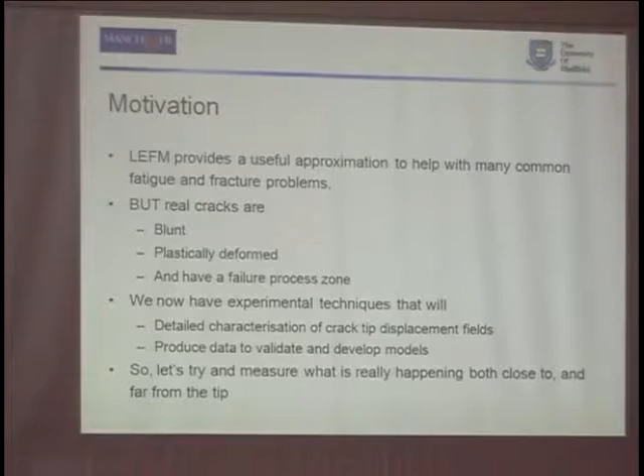The motivation behind this work is that we all agree linear elastic fracture mechanics gives us a useful approximation to help with many fatigue and fracture problems. However, real cracks are blunt, they're plastically deformed, and depending on the loading and material properties, have different failure process zones. But we now have many good techniques for detailed characterization of this crack tip field, and we believe this can help us generate a lot of data to validate as well as develop new analytical models to help us deal with fatigue and fracture.

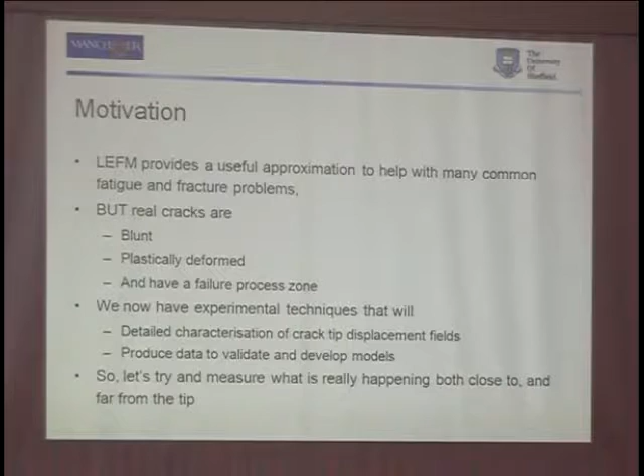So we decided to try and measure what's really happening both close to the crack tip and far away. Now I'll go on to the experimental work that we did. Quick information on some of the test procedures we did.

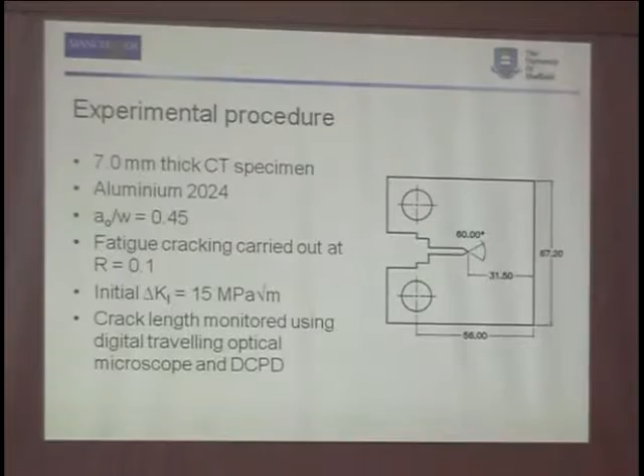This was a 7mm thick CT specimen in 2024 aluminium. The grain size was fairly large, so the fatigue crack wasn't as straight as we'd liked it to be, as I'll show you later. The initial a/W was 0.45. Fatigue cracking was carried out at an R ratio of 0.1.

As opposed to load shedding or reducing the load as the crack grew, we just started off with an initial delta K of 15, which was about 2.5 kilonewtons. We pre-cracked this specimen up to a 5.3mm crack, and then we just tore it to get some tearing crack data. The crack length was monitored using a

digital optical traveling microscope, which was a stereo microscope, allowing us to also do 3D DIC on the surface. We also did a few tests using DCPD so that we could correlate our crack lengths. This was the other reason for using a 5.3mm crack, because after that, once we tore the specimen, we could measure the crack and know exactly where it is. That's why I'm presenting with that data.

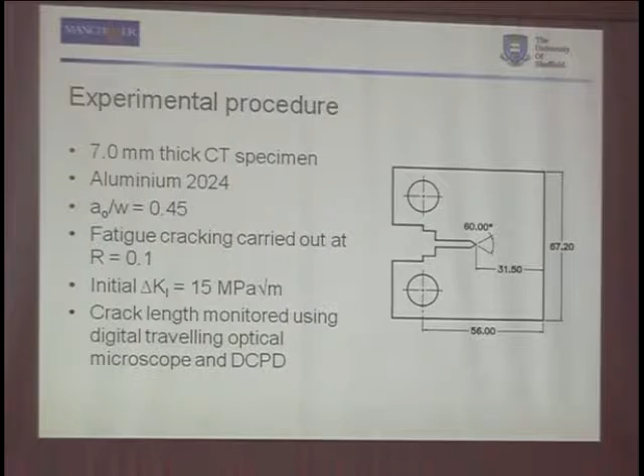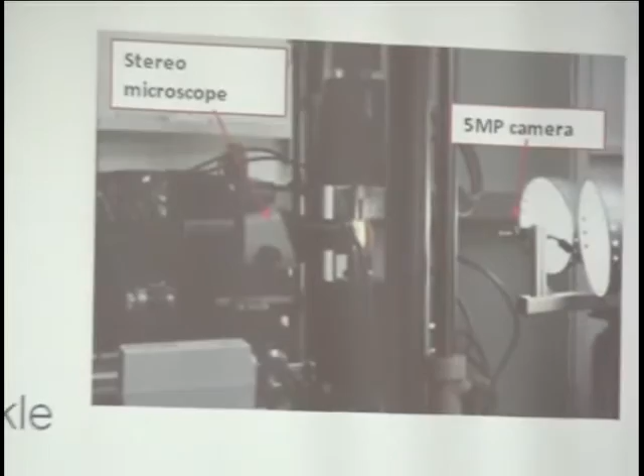Right, here's the measuring setup. You can see that's the microscope there, the specimen, and the 2D DIC, because we ran out of cameras at that point. So we had two cameras attached to this microscope, a single camera with the same CCD, and a 50mm lens, which in hindsight we can afford to buy a longer lens so we can actually look much closer to the crack without losing resolution.

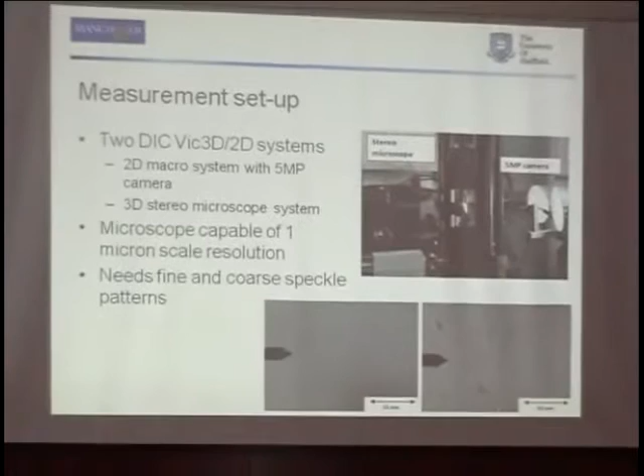But this microscope system will allow us to measure up to a resolution of 1 micron. Obviously, this was discussed with Pablo last night over the speckle patterns. The speckle pattern requirement is quite different.

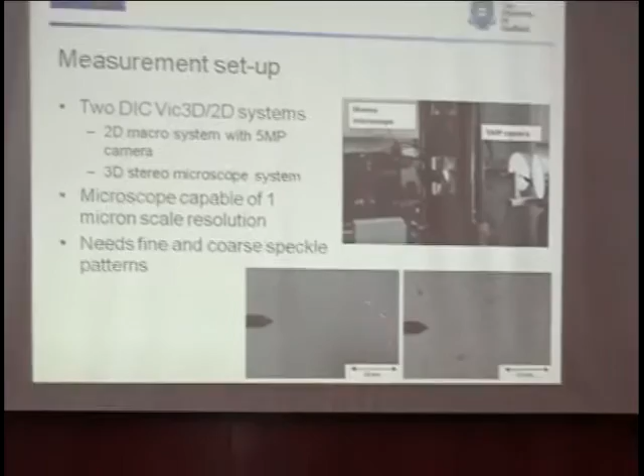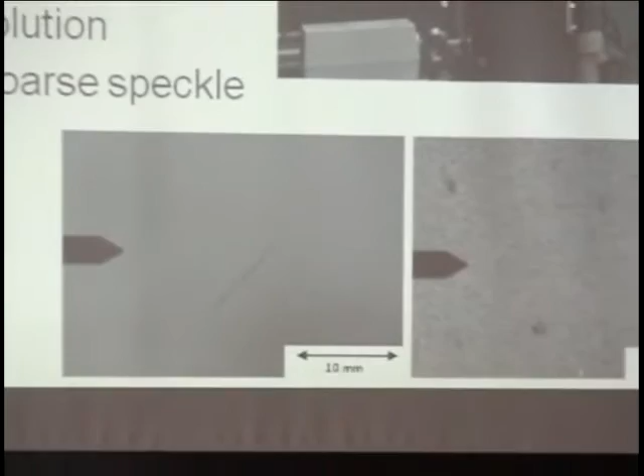For these two images here, it's just the speckle pattern requirements for the front and back face of the specimen. This is for the macro one, for the 2D, and this is viewed on the same scale but for the microscope measurement. In terms of speckle size, each speckle here is in the region of 3 to 5 microns, and here it's in the region of 10 to 20 microns.

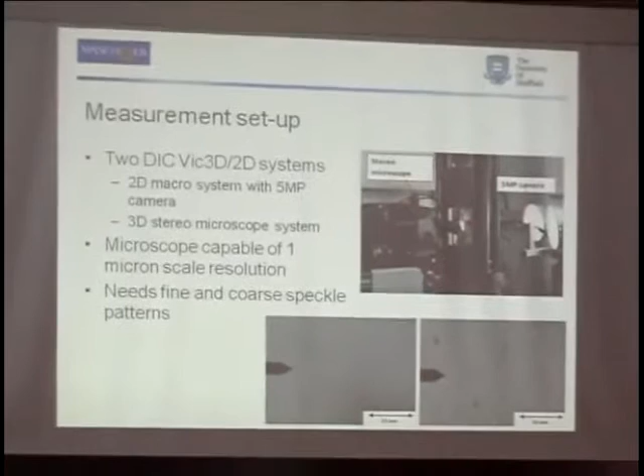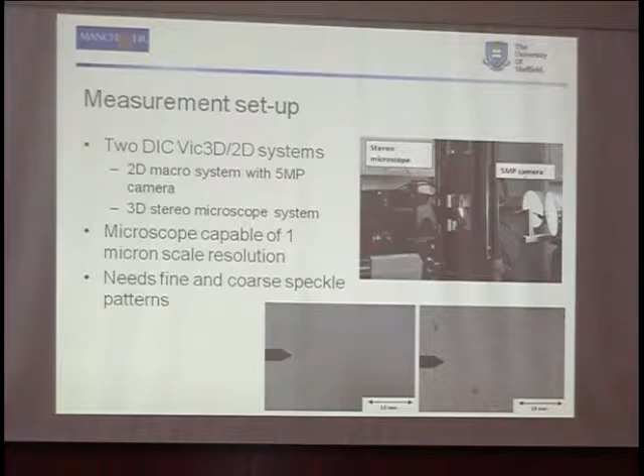So we did the test, cycled the specimen, and at different crack lengths we just took a series of images. We had to slow it down because the cameras weren't high-speed cameras, so we had to slow the test down to get a sequence of images. So just to show you a couple of videos showing the macro.

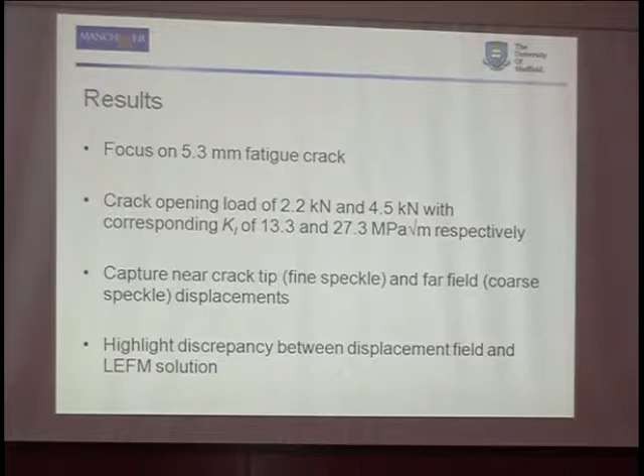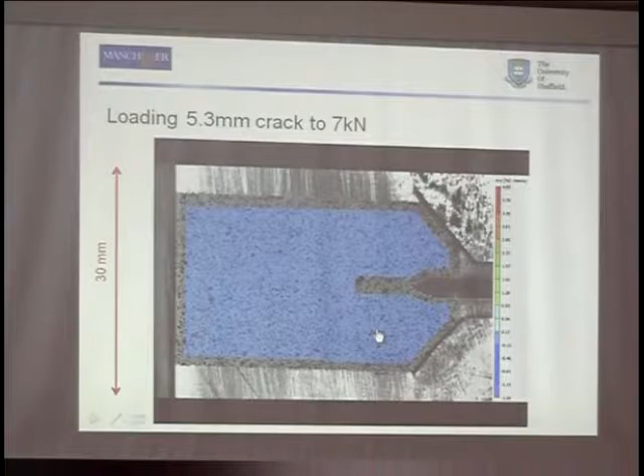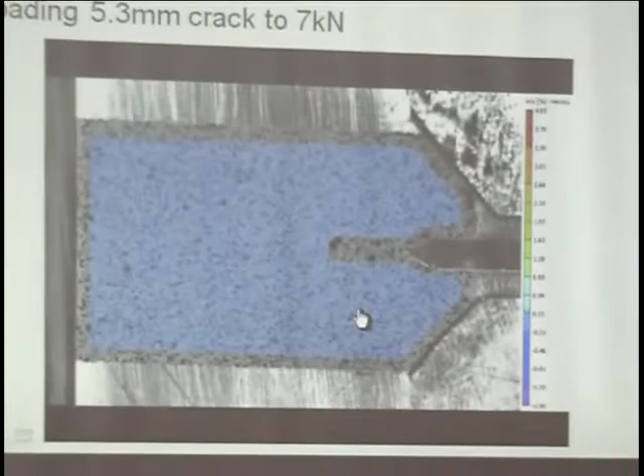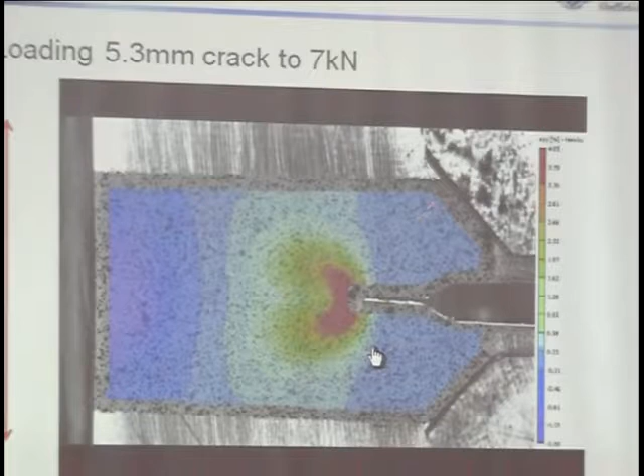You can see that it's quite characteristic of the strain fields for a CT specimen, the double lobes, and strain of up to 4%, but this has gone way past the fatigue crack loads.

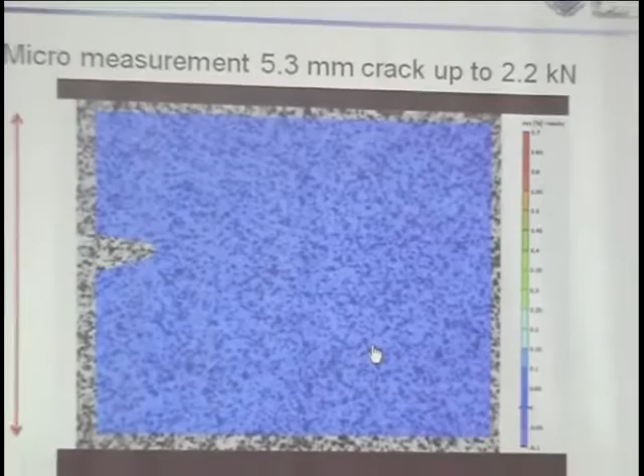On the reverse side, this is the cyclic data that we obtained. As you can imagine, on the macro side, we didn't really see very high strain. The strains were in the region of 0.2%. So in the far field ones, you only get the elastic bit and not the plastic. But from the microscope data, you can see the plasticity around the crack.

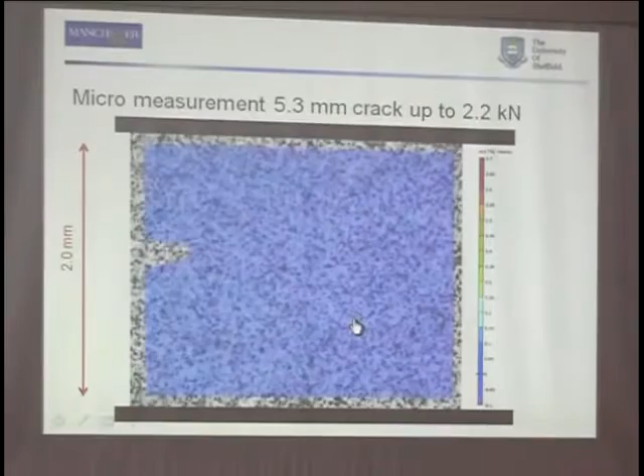You can see that crack there, it's not straight, that's the fatigue crack, about 5.3mm from... probably play that again. And they hold, that's about 2 millimeters by 2.5 millimeters. In some tests we've got some data behind the crack tip, but we're not showing that here today.

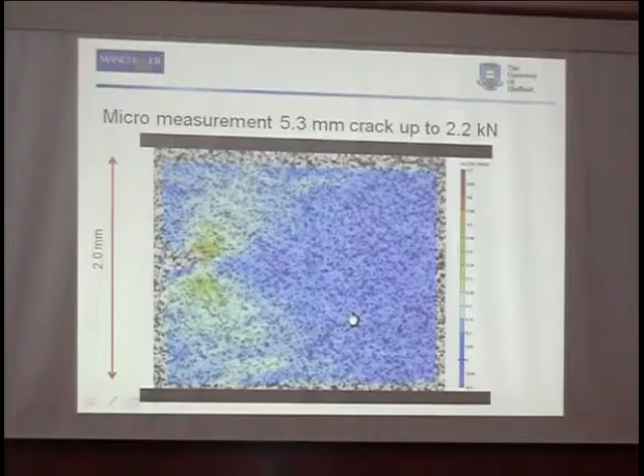But the data is available if anybody wants it. So you can see from the micro measurements that's significant, and well, you can measure the plasticity around the crack, and even for a fatigue crack, there is significant amounts of plasticity. This is just a snapshot of the displacement field at 2.2 kilonewtons for both micro and macro fields.

This is for the same specimen, that's on one side and that's on the reverse side. And you probably can't see that well here, but if you look at the scaling there, the difference from that to that is only about 4 microns.

So we get very detailed measurements of this field very close to the crack tip. Whereas from here, I think that's about 20 microns. But what I would say is due to the optics and the distance of the camera and the field of view, for the fatigue crack loads, the displacements were near the limit of the DIC system for the 2D.

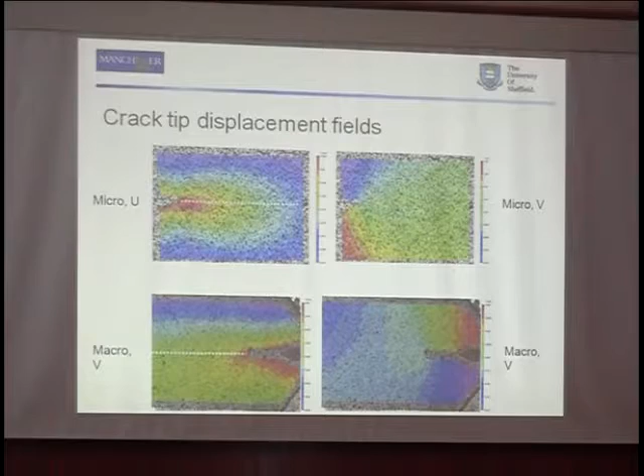So what we did then was a preliminary investigation. We extracted displacement fields in the U direction, horizontally along those two white lines, just to compare that with linear elastic predictions. And that's for the 2.2 kilonewton crack.

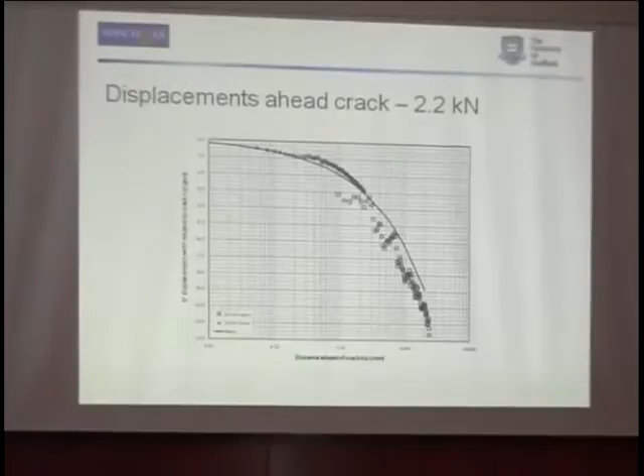So, apart from very near the tip, most of it is fairly elastic. You can see that the data agrees quite well with the linear elastic fracture mechanics predictions. Whereas for the 4.5 kilonewton crack,

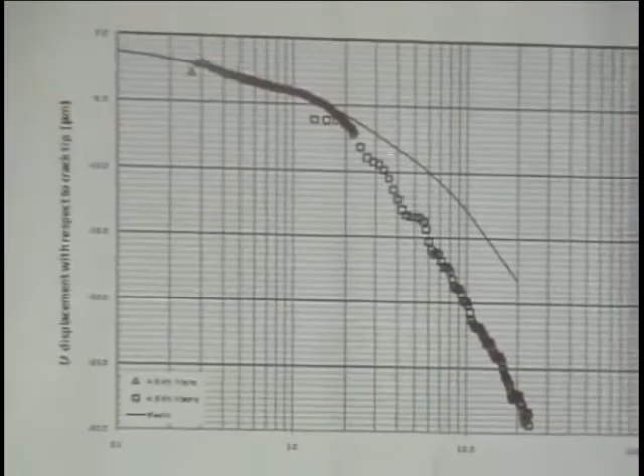you see further away from the crack tip, but this is just along the horizontal line, the data falls away. But what's interesting about this data for both is that even though it's on two different sites, we get very good continuity between the micro and macro displacement fields.

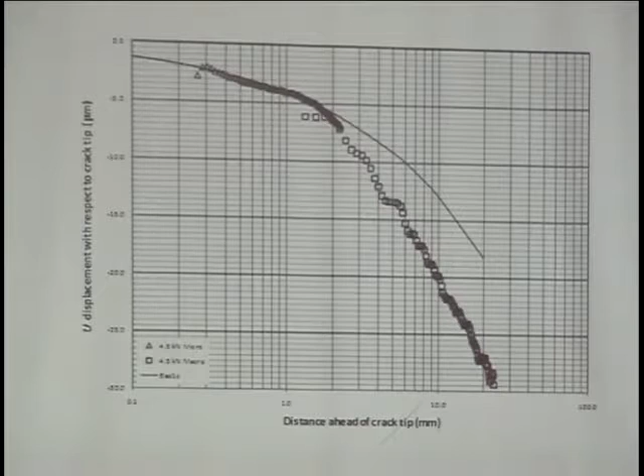So you sort of just get this continuation quite evenly about 15 millimeters, about 20 millimeters ahead of the crack tip.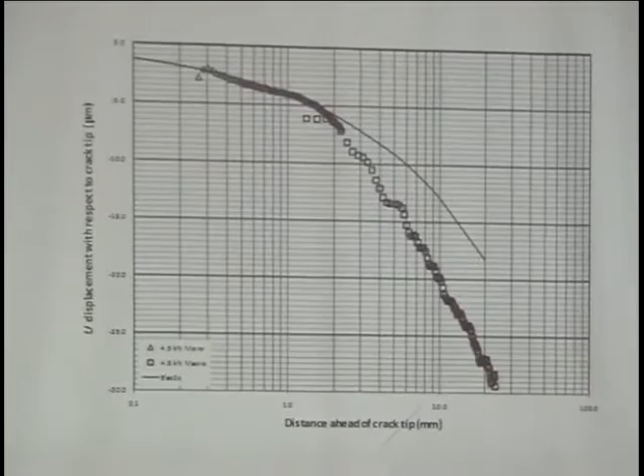And we suspect where the characteristics of the two plastic lobes are, we'll probably get significant deviation from that.

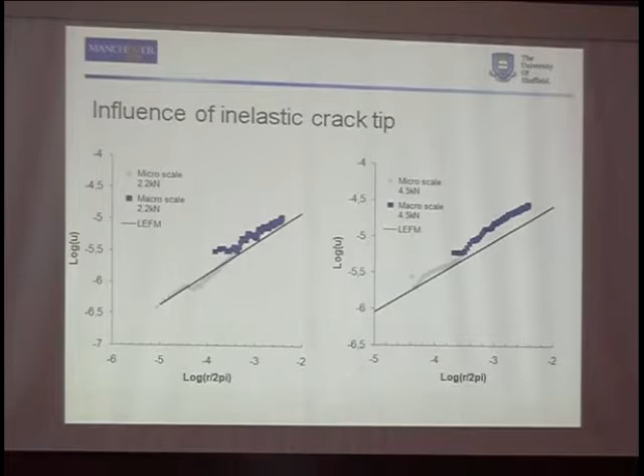So, just some final comments. The development of the nonlinear displacement field around the crack tip can be accurately measured with DIC, especially if you've got the right optics. The resulting data from tests in this 2024 demonstrates the amount of information that's available, and we've probably not even scratched the surface in terms of analysing what we've got.

And we believe that crack tip displacement fields are fundamental to the characteristics of the loaded crack.